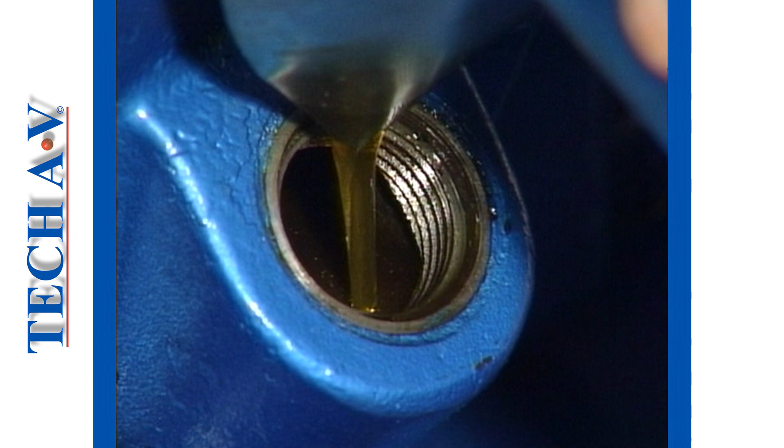The first important check is to see that the level is correct. The oil level determines the amount of oil being held within the crankcase. There are three main types of oil level checking devices, namely the sight glass, the level plug, and the dipstick.

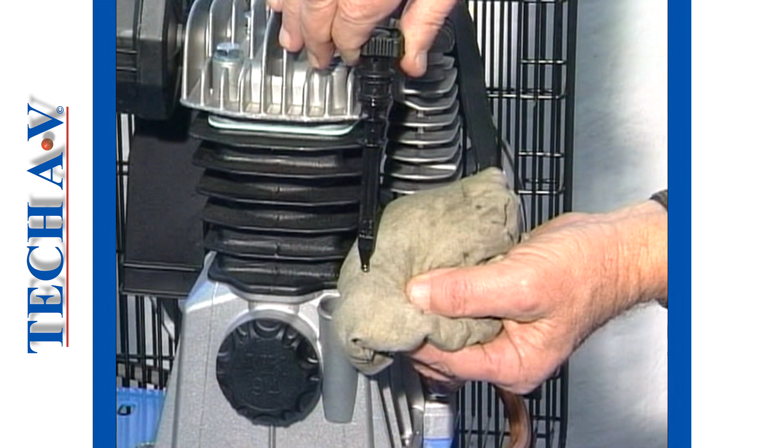Checking the oil level. It is important that the oil level is checked only when the unit is stopped and has been at rest for a few minutes. This delay allows time for the oil to settle in the crankcase.

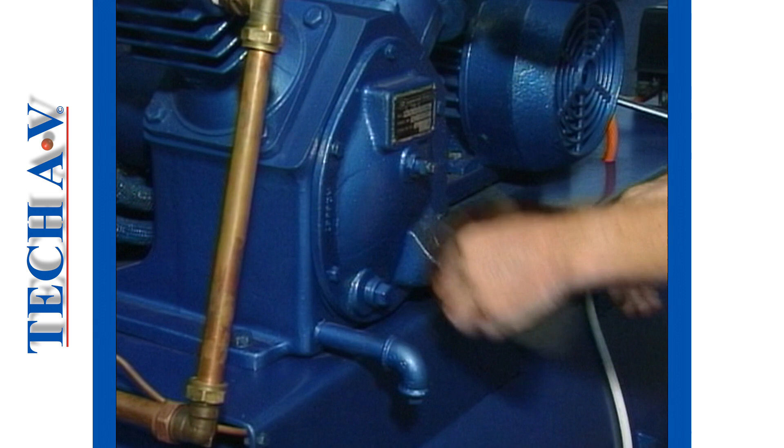Where a level plug is used, begin by cleaning the plug and the surrounding area. Using a suitable spanner, slacken and then remove the plug. Observe the oil level through the hole, where, if full, the oil should reach the top edge of the filler neck. If oil cannot be seen inside the filler neck, then the compressor is low on oil.

To check the oil level with a sight glass, observe the glass, wiping it clean if necessary, and check the level of the oil against the indicated mark, or ensure that the level is at or near the top of the glass. Oil should always be visible in the glass window.

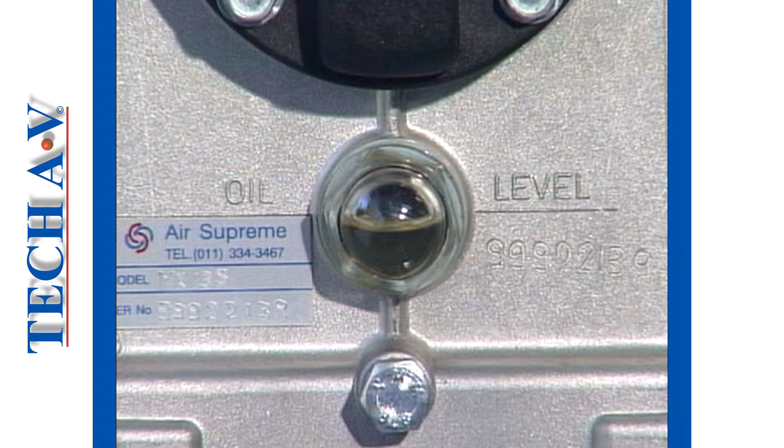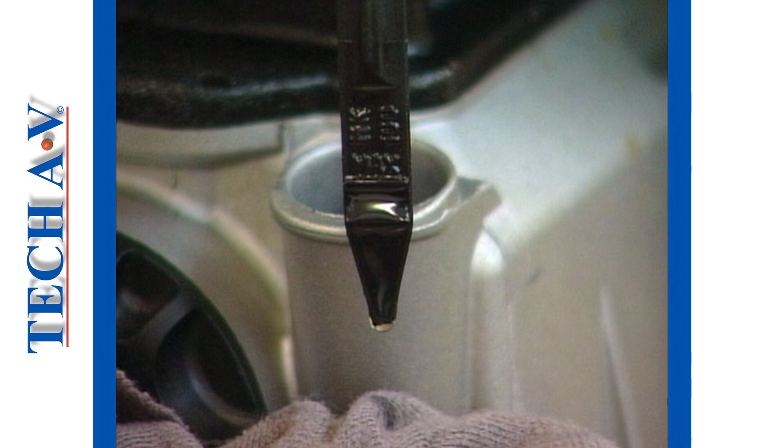On models with dipsticks, begin by cleaning the area around the dipstick. Remove the stick and wipe it clean. Return the stick into the tube or hole and push it fully down. Remove the stick again and, keeping it upright, observe the oil mark. The oil should reach the full mark, or at least be above the low mark.

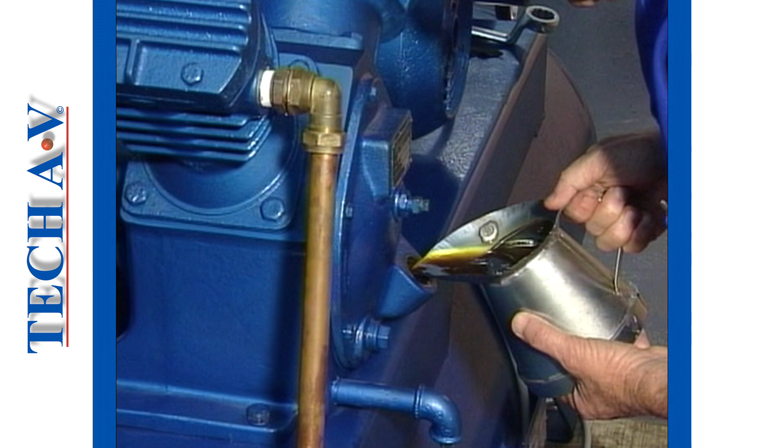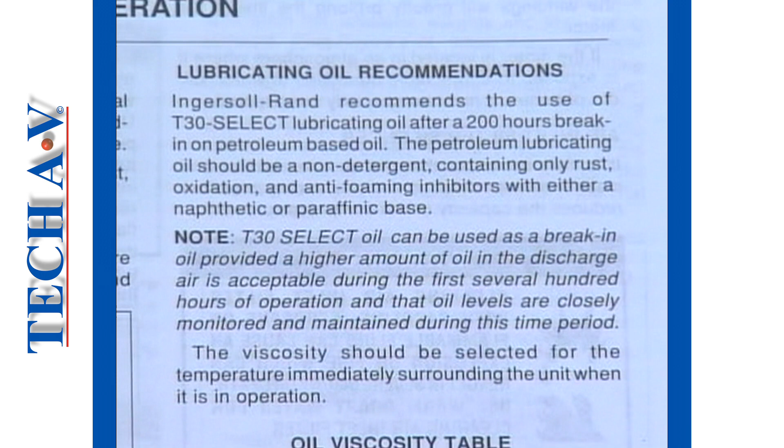Topping up simply means adding sufficient oil to return a low level to a full level. First, it is very important that you know what type and grade of oil is to be used. Adding the wrong oil can result in major damage to a compressor. There are three ways in which you can find out the correct oil to use. Firstly, you can check the unit's operating manual. Or you can look on the unit for the specification label or plate. Or you can ask your supervisor.

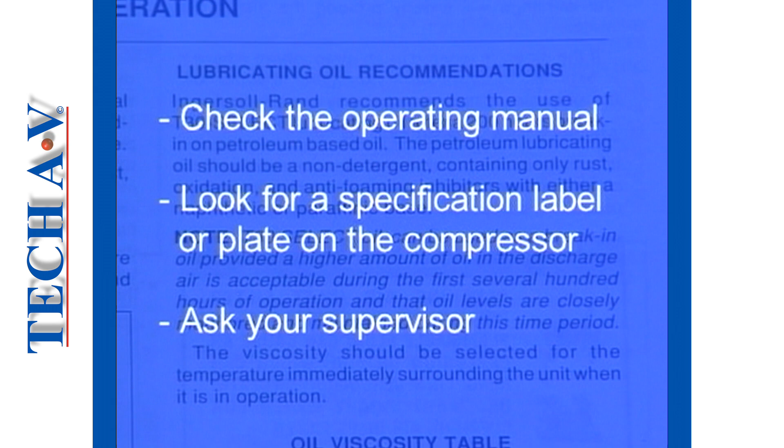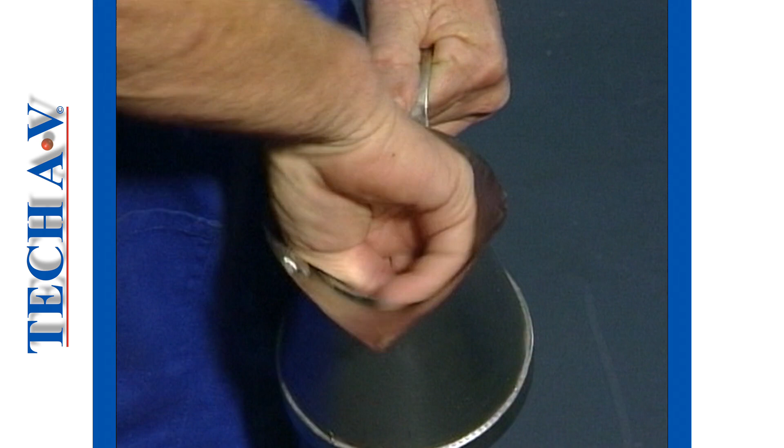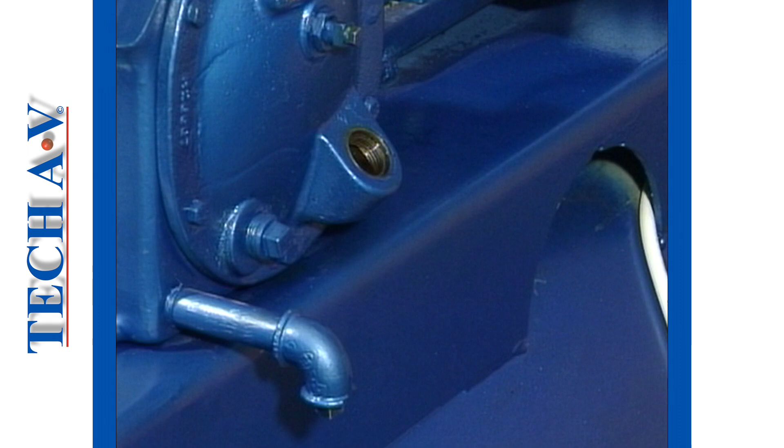We don't need dirt or other contaminants entering a compressor. So, before topping up, make sure that everything is wiped clean. Remove the oil filler cap and pour the oil slowly into the compressor. If you try to speed up this process, the oil will blow back and will be wasted, besides making an oily mess everywhere. Add sufficient oil to bring the level up to the relevant full mark, but do not overfill the unit. Replace the filler cap as soon as the topping up has been completed to reduce the chance of contaminants entering the compressor.

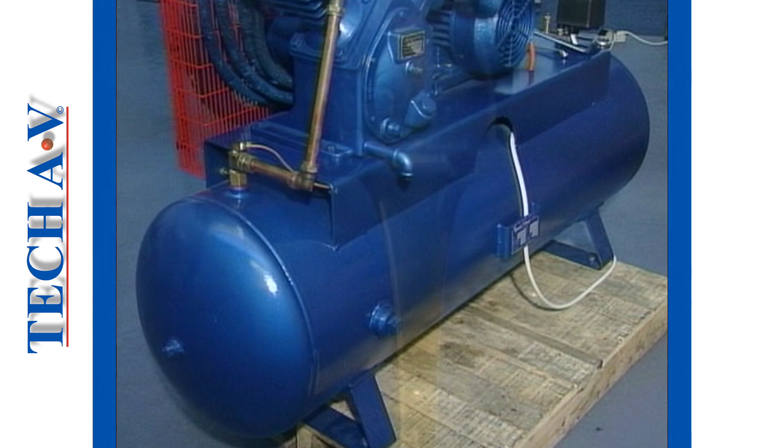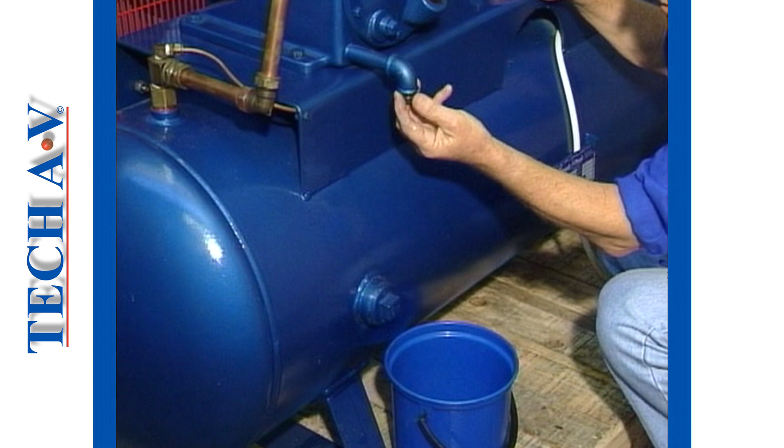Oil must be changed at regular intervals, according to the manufacturer's recommendations, in order to extend compressor life. An oil drain plug will usually be found at the base of the crankcase. For best results, oil should be drained whilst the compressor is at operating temperature and with the filler plug removed. Place a suitable catcher container below the drain plug, and then remove the plug. As it can take quite some time for all the oil to flow out, you might want to attend to other tasks while this is going on.

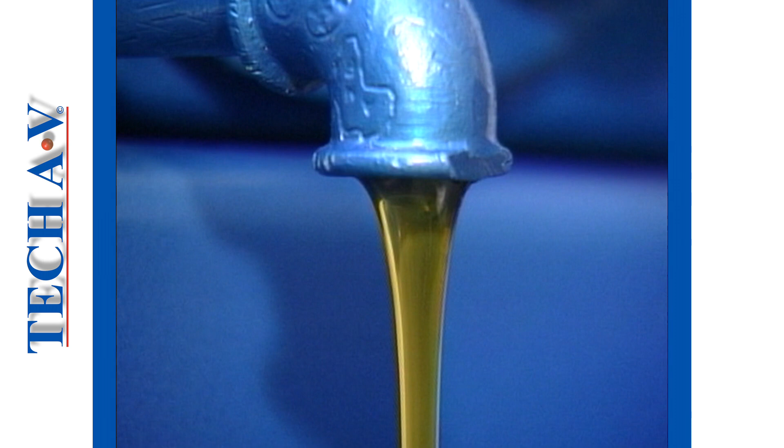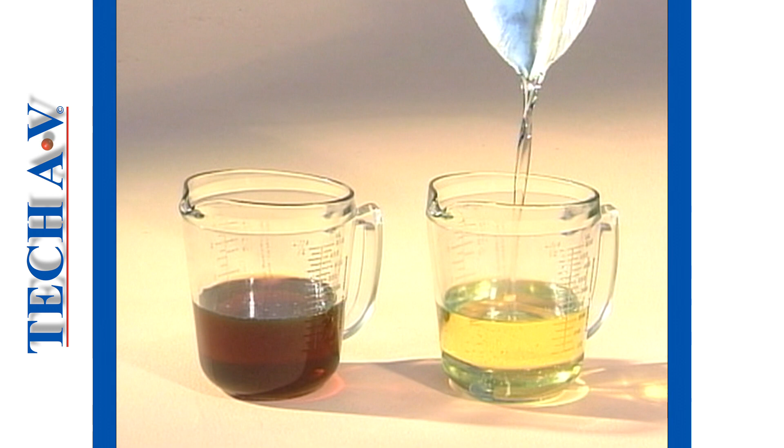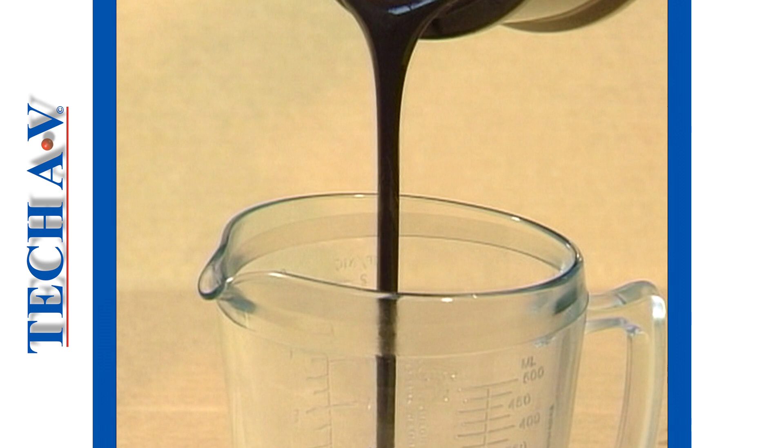Certain clues about the compressor's condition can be obtained by checking the condition of the oil as it drains. New, fresh oil is always clear and clean in appearance, although colors may vary between different manufacturers. Oil is designed to hold dirt and contaminants in suspension as it works, and this is why you will find that it goes dark after many hours of normal operation. Something is wrong if the oil appears milky when you check or drain the system. Something is also wrong if the oil is black, thick, and smelly. Both these conditions should be reported for further investigation.

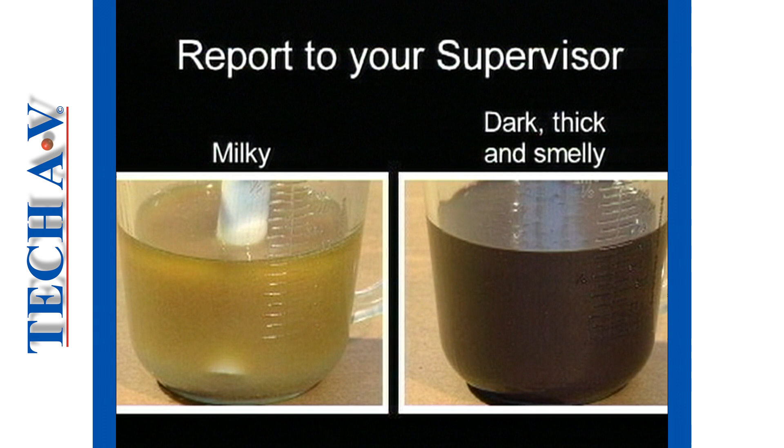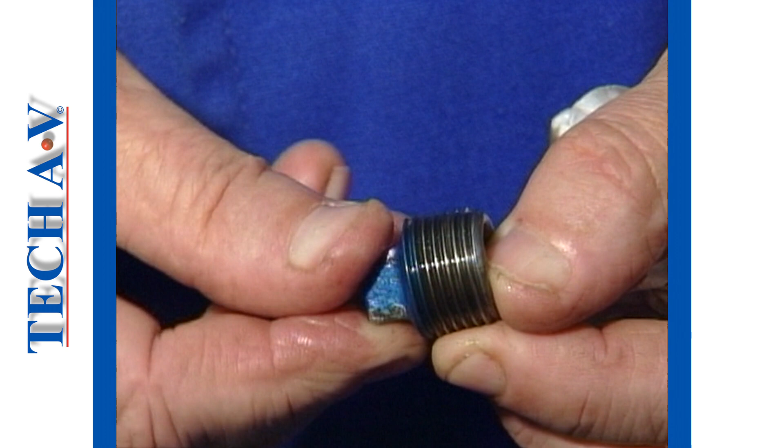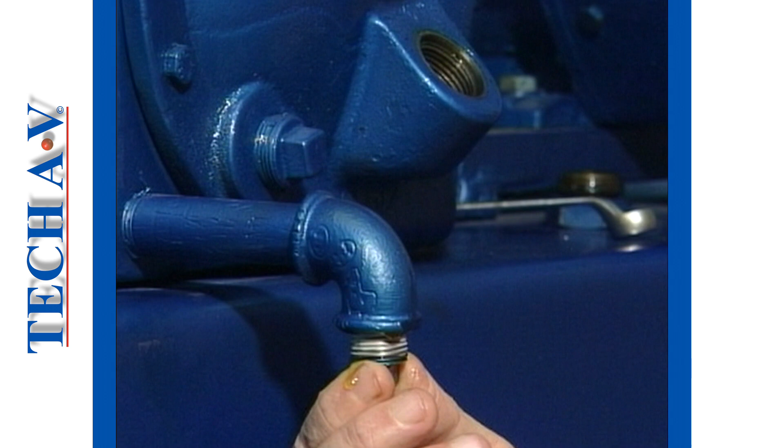When the oil has completely finished draining, then the drain plug must be replaced. Check the thread condition of the drain plug. Damaged threads could result in a leak. It is suggested that thread tape be applied to minimize the chance of a leak where plain plugs are used. Replace and secure the drain plug.

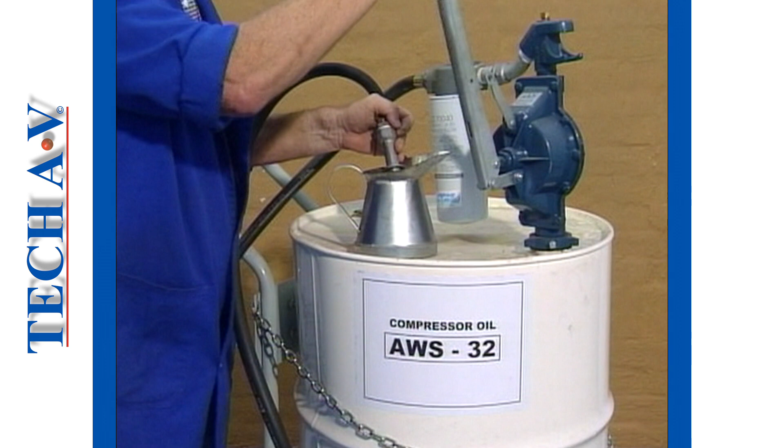Next, obtain the correct quantity and type of oil. Fill the crankcase to the proper mark in the manner described for topping up.

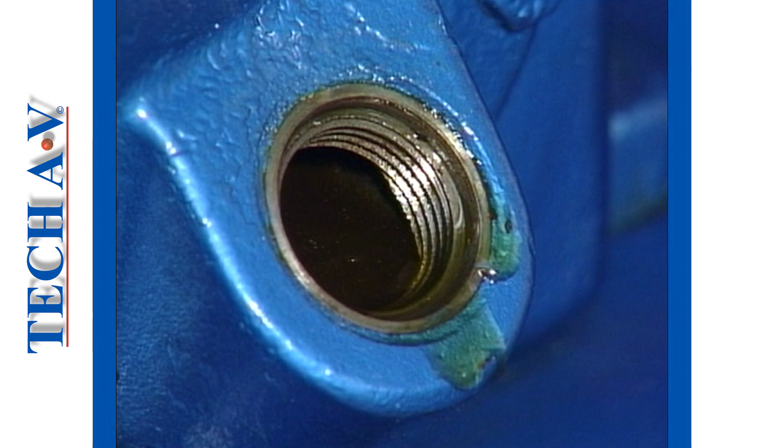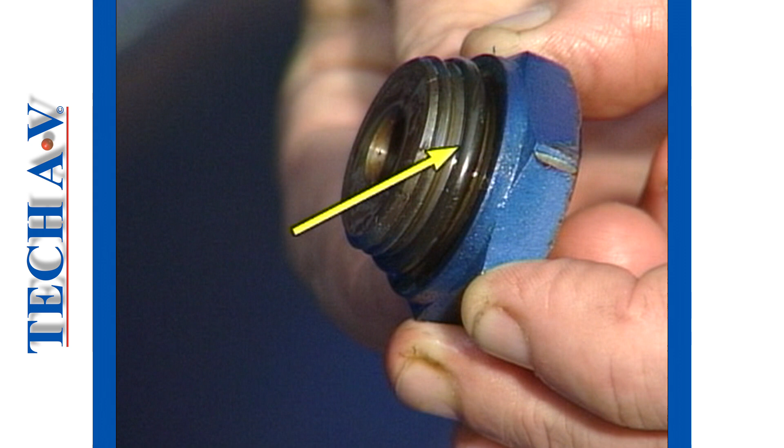In some instances, such as we have here, the filler plug incorporates a sealing device to prevent dirt from entering the crankcase. On this plug, it is an O-ring. On other plugs, it may be a copper washer. Make sure that this seal is in place and is in good condition. Replace the filler cap or plug and wipe away any spills.

In summary, when dealing with lubrication, the important points are using the correct and recommended type of oil and keeping everything clean as you work.

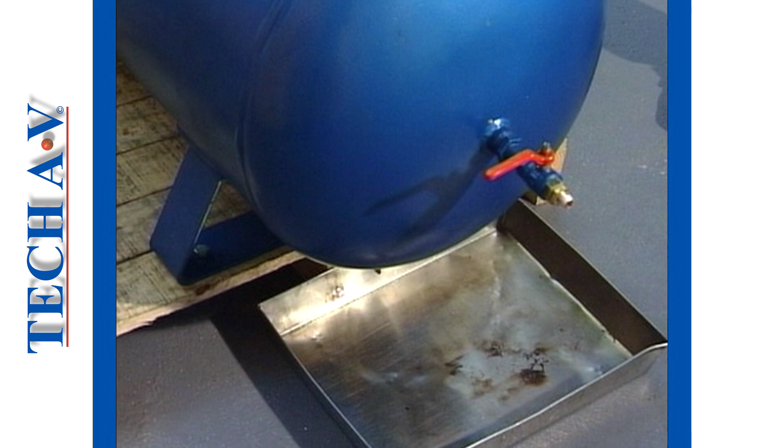Draining the condensate. Condensate is the term used to describe the water that collects in air systems from the condensation of airborne moisture. On most tank-mounted compressors, the condensate is normally drained manually from the receiver. The drain valve is situated beneath the tank and will always be at the lowest point. If the drain valve is not connected to a waste line, then place a catcher tin beneath the valve to commence the job.

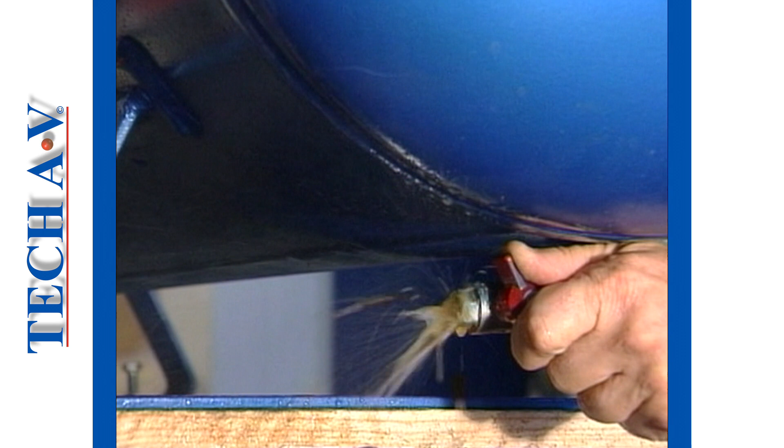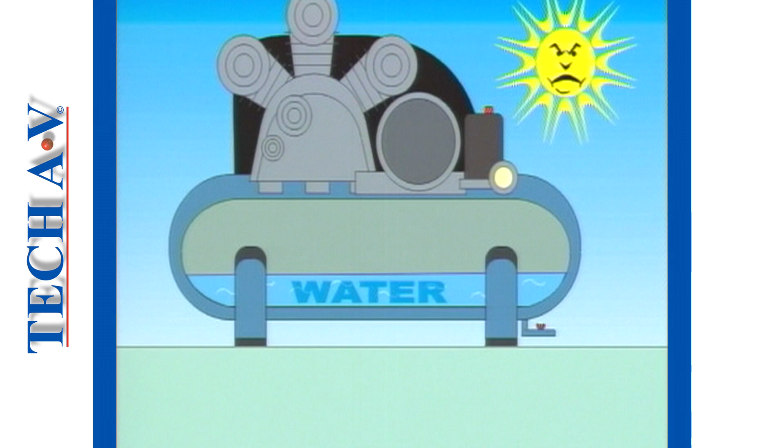Slowly open the drain valve and allow the water to drain off. You don't need to open the valve fully, as this will only waste air. Failure to drain the condensate on a regular basis, especially in warm weather, will result in excessive water entering the system.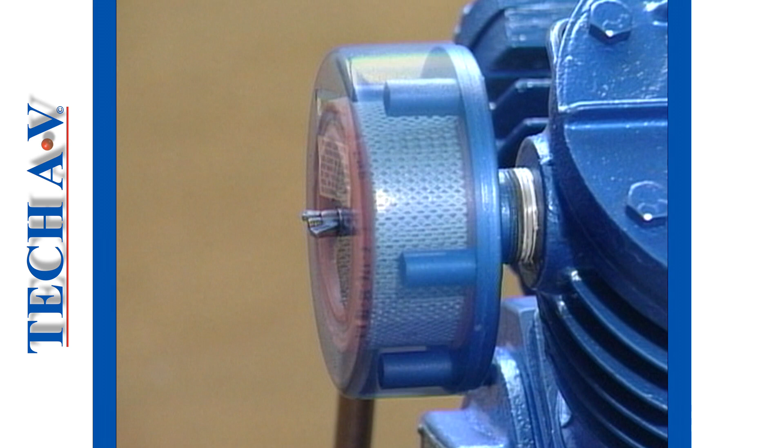In this section, we will describe air filter service operations. The fundamental purpose of an air filter is to prevent solid particles from entering the compressor and the rest of the system. The most common type of air filter comprises a filter housing, in which you will find a dry-type filter element. Most dry filter elements are constructed of a special type of paper through which the air will flow. The paper is known as the filter medium.

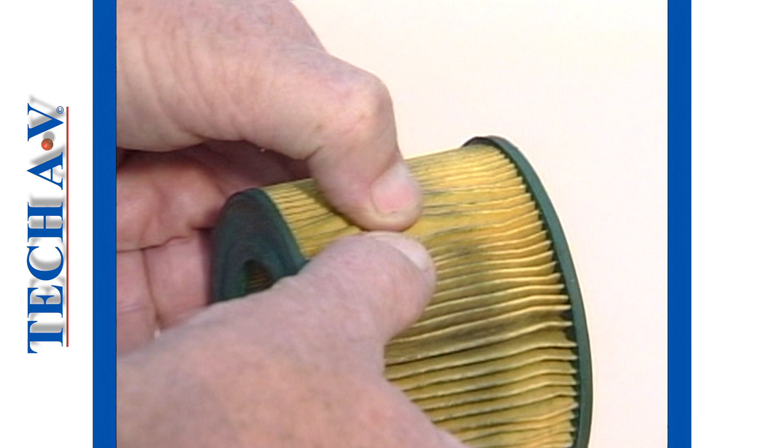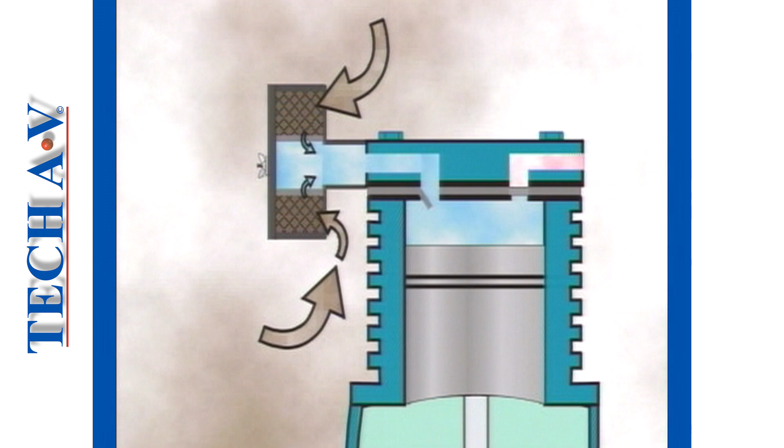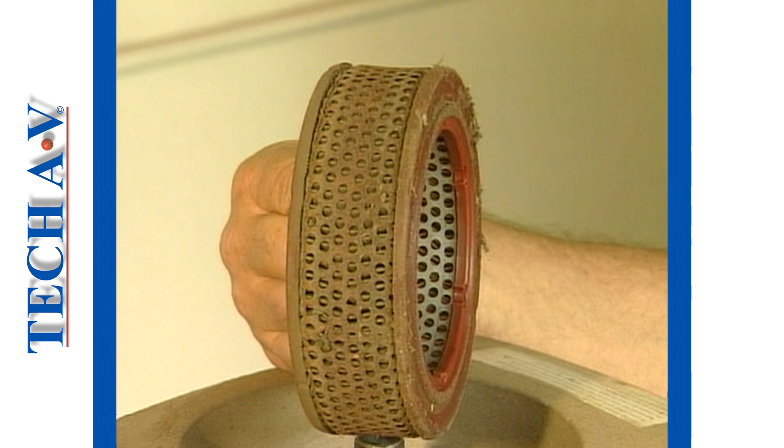Dirt and solid particles become trapped in the medium, and eventually the filter can become clogged. When a filter is clogged, the air cannot easily pass through, and the compressor will not provide its proper delivery. For this reason, a filter element must be either cleaned or renewed periodically. If the local conditions around the compressor are simply dusty, then a filter element can be cleaned.

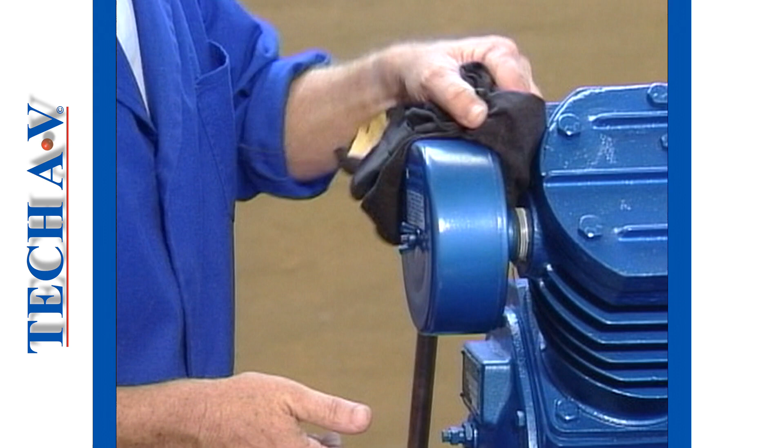We shall now describe a typical cleaning procedure for a dry-type filter element. Begin by wiping away the dust and accumulated dirt from around the filter housing. Remove the securing nut and then take off the housing. Separate the element from the filter housing.

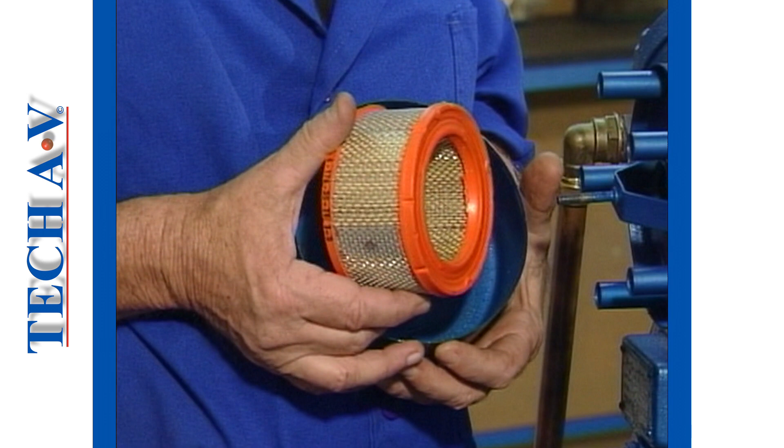As our demonstration unit has done no real work, the element is still very clean. This is not a normal situation. In an industrial environment, an element may become very dusty. A few taps against your hand will dislodge the heavy dust particles.

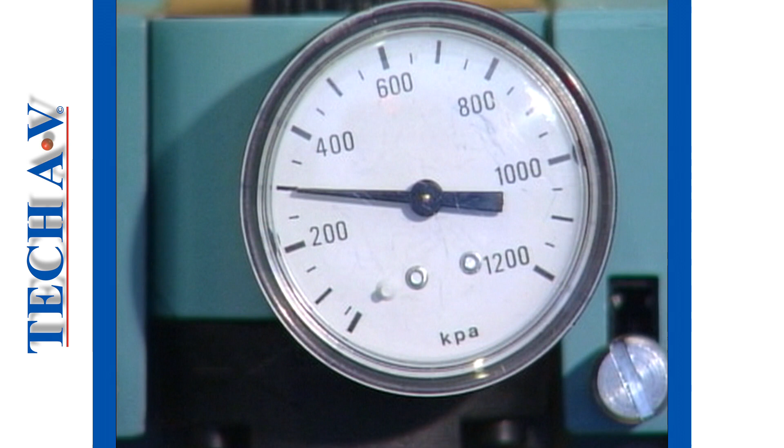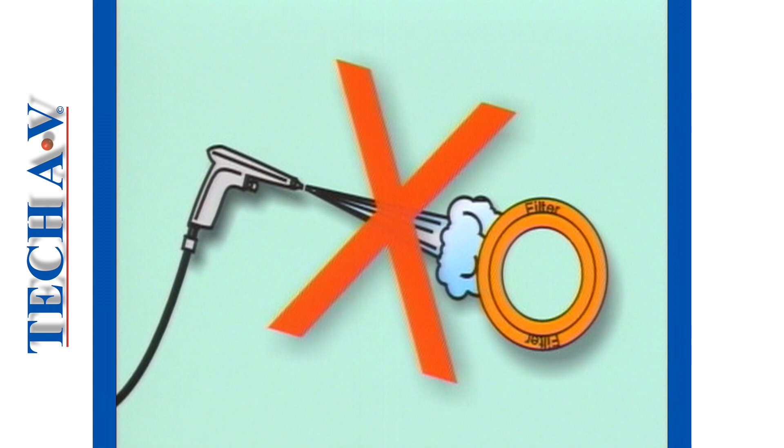Now, with the shop air hose and the duster gun, blow the filter from the inside. Note that you must not use a pressure higher than 3 bars for this operation, or you will damage the filter medium. Blowing from inside to the outside forces the particles to be pushed out the way they entered. If you try to blow from the outside, you will, in effect, be pushing the particles deeper into the filter medium, and this will result in further clogging.

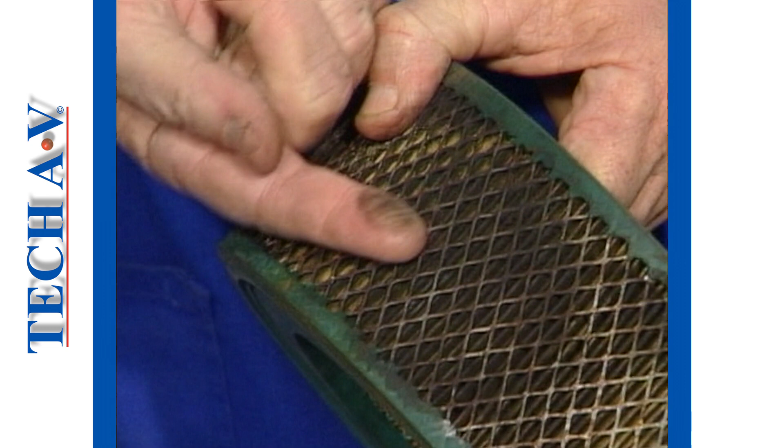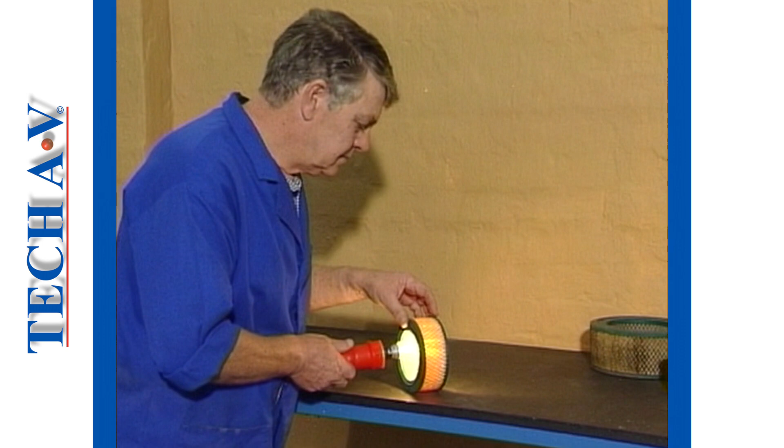In this example, the element is contaminated with a greasy residue, caused, most possibly, from local fumes. This element cannot be cleaned using the air hose, and it will need to be discarded. Use an inspection light inside an element and check for any small holes or tears in the filter medium. We should never reuse an element that is damaged, as dirt can enter the compressor through very small holes or tears.

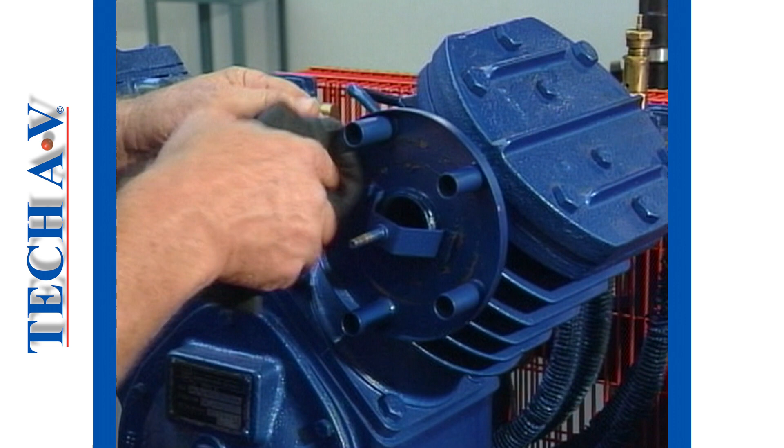Although a very basic task, the fitting of a filter must be done correctly to avoid dust entering a compressor. Wherever the filter housing is threaded into the cylinder block, it is always recommended that thread tape is used to seal the threads, thereby minimizing the risk of dirt bypassing the filter. Wipe the filter housing to remove dust and dirt before you replace the element. Assemble the unit carefully, making sure that the element sits properly on its mounting or base.

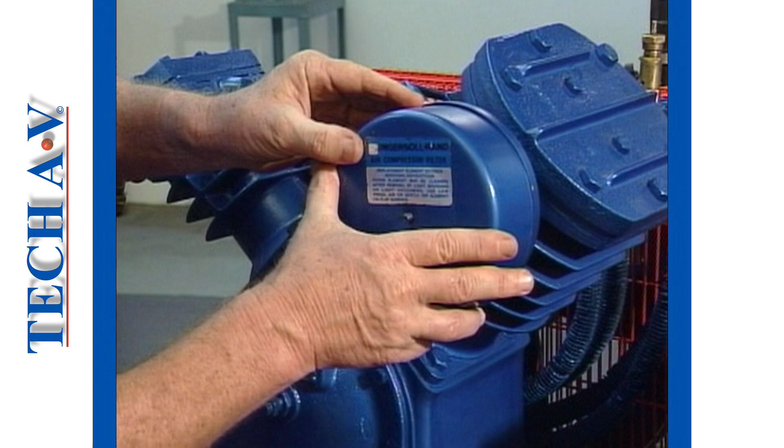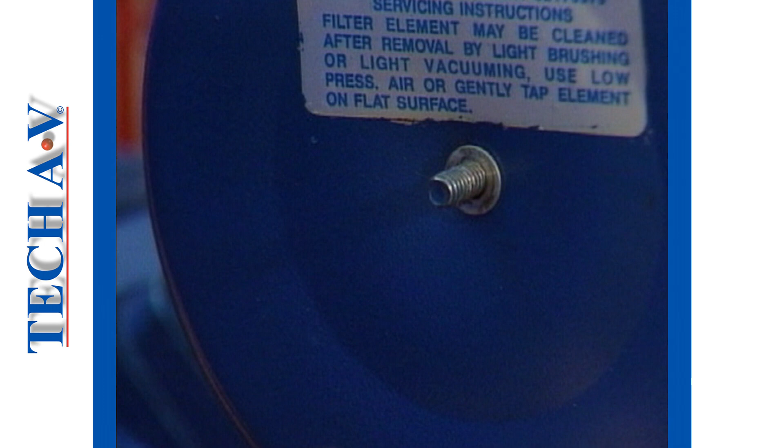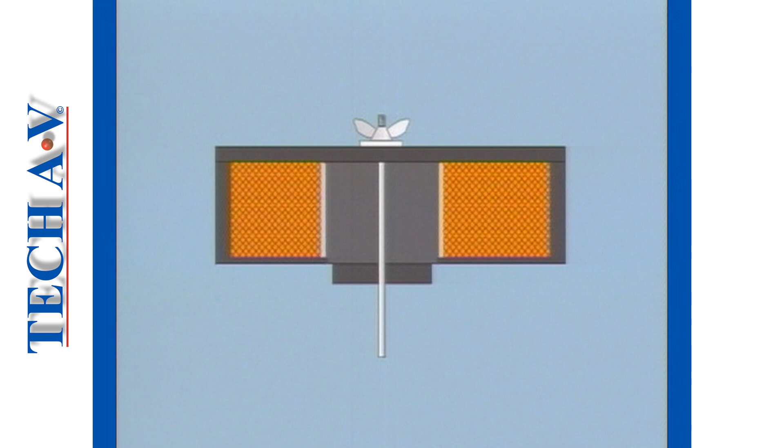Replace the cover. Where applicable, but very importantly, replace the washer that sits beneath the retaining nut or screw. If you leave this off, you run a great risk of dirt entering the compressor. Fit and secure the retainer, but do not over-tighten. Where flat metal covers are used, check that the cover sits flush to the housing and that there is no distortion. A distorted cover will permit dirt to bypass the element and enter directly into the cylinder.

In this section, we shall deal with the procedures involved with servicing drive belts. When working on the drive belts, it is vital that the compressor is totally isolated from the power supply. To perform this task, you will usually need to remove the safety guard. With the guard removed, check each belt for signs of wear or damage.

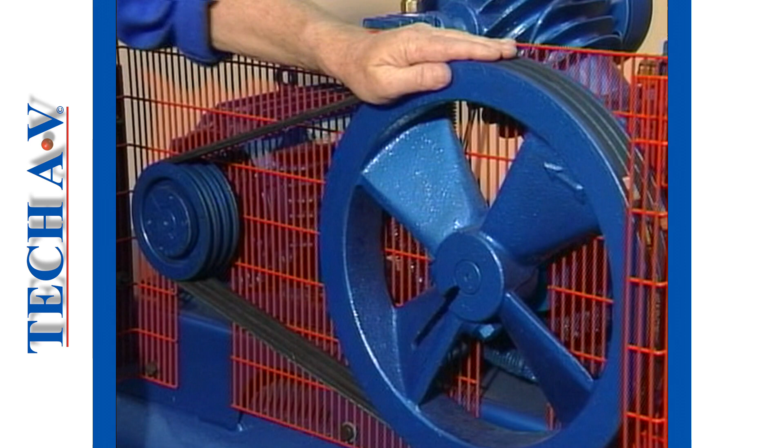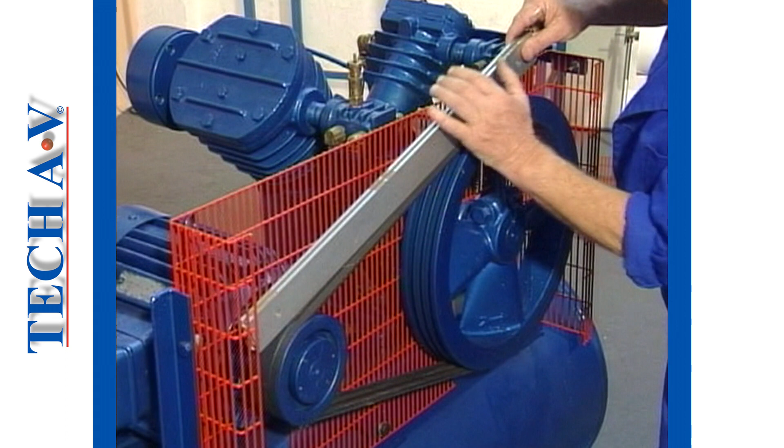Rotate the flywheel carefully so that you can inspect the full length of each belt. Check the tension, making sure that the tension is equal between all the belts. If the tension is not equal, then a new matched set of belts will have to be installed.

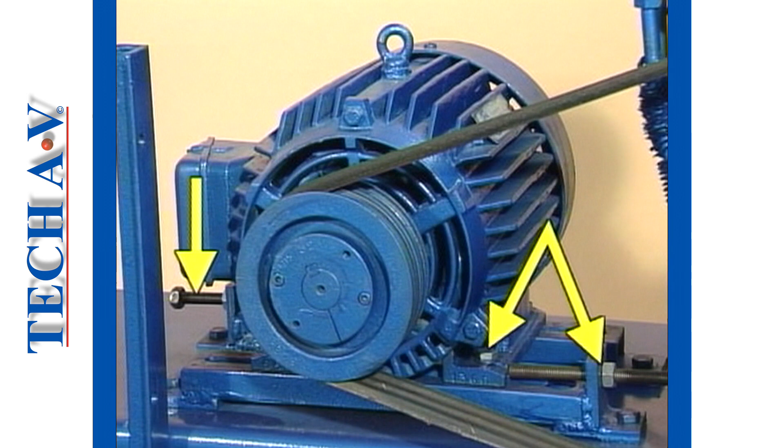Where applicable, adjust the tension in the appropriate manner. Note that the subject of belt maintenance is fully covered in Tech AV modules B-C-D. To complete the task of belt maintenance, refit the guard and check that it is secure.

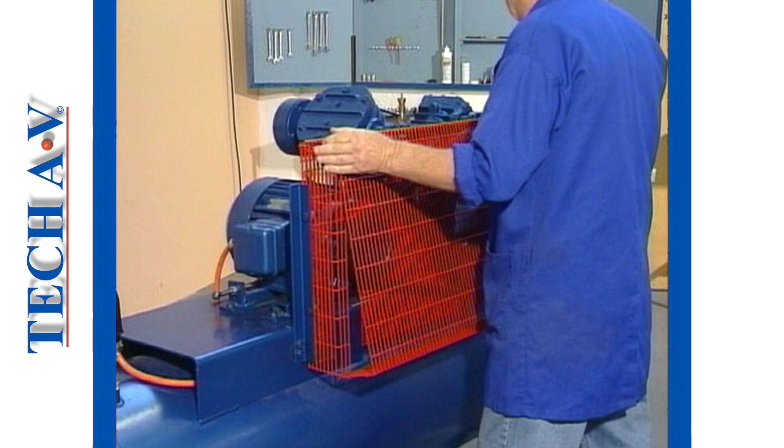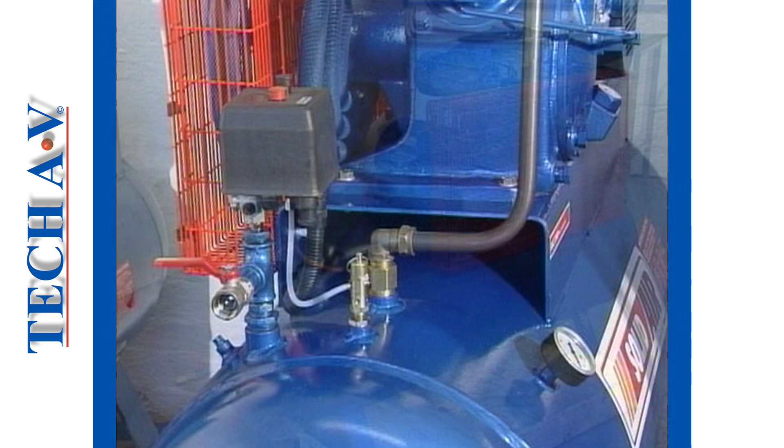Certain routine checks can only be made with the compressor operating, or when there is pressure in the receiver. We shall look at these tasks in this section. Every receiver must have a safety valve, and these must be checked to see that they operate. The task is very simple.

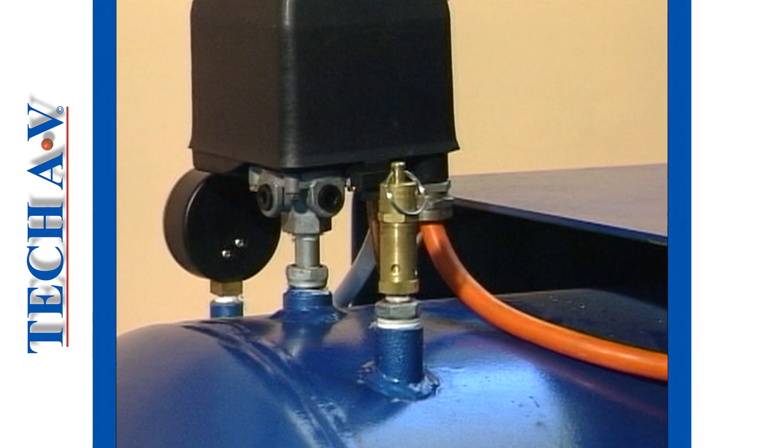With the compressor operating at or close to its maximum operating pressure, simply pull the spindle using the pull ring and then let it go again. Air should release and then shut off quickly when you release the ring. If a safety valve does not release air or does not shut off quickly when released, then report this to your supervisor.

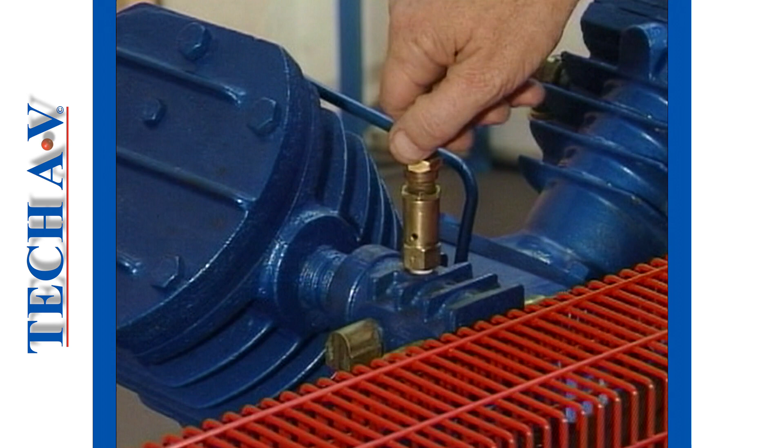Two-stage compressors have a safety valve on the interstage outlet. Test this valve in the same manner as the tank valve. Note that this valve will only operate whilst the compressor is running. Compressors equipped with a cutout should be tested to see that the cutout is correct. This, too, is a very simple task.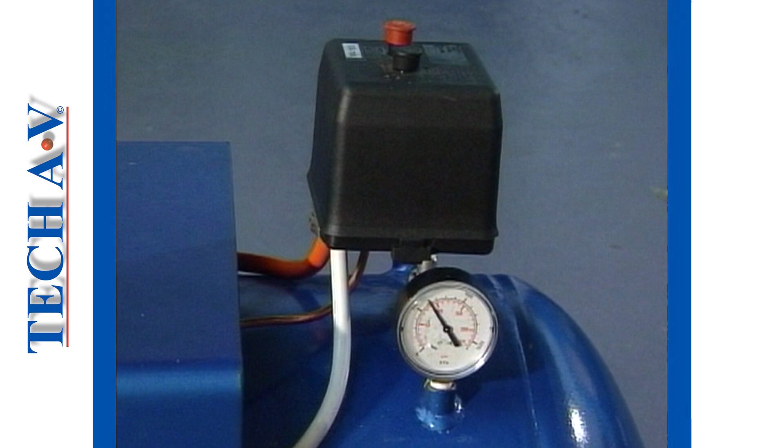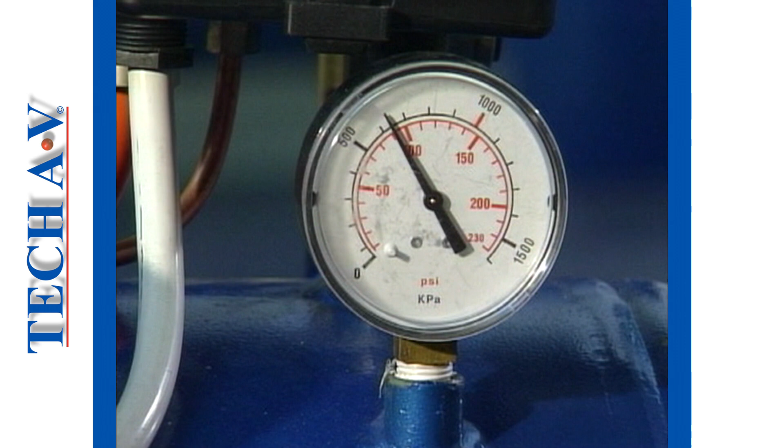Close the main supply valve in order to keep the pressure restricted to the receiver only. Simply note the pressure at which the compressor motor cuts out. This pressure should be limited to the system pressure set for your system by your plant engineers. Although the cut-out and the cut-in pressures can be adjusted, you must not make any adjustment on your own. When necessary, ask your supervisor to check the pressure and to make any adjustment.

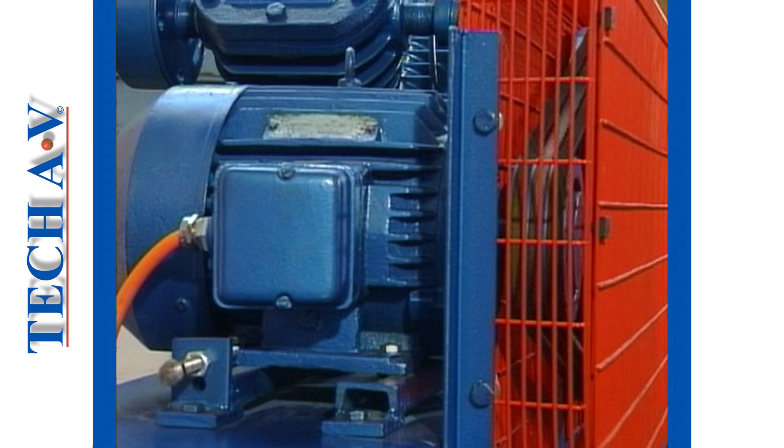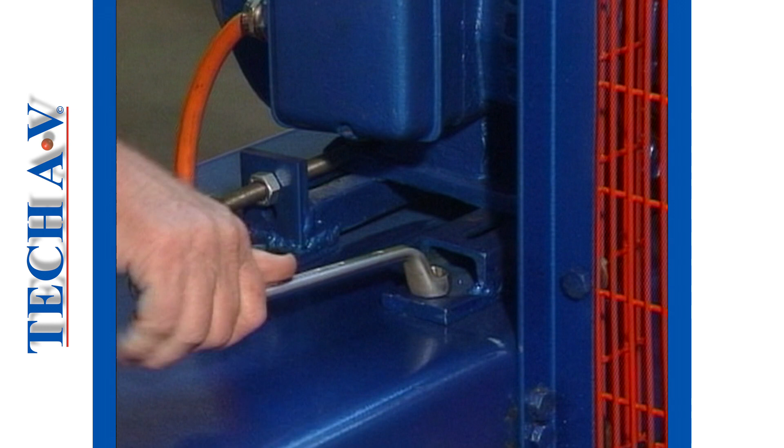Reciprocating compressors are prone to vibration, which results in the need to check the fasteners on a regular basis. Begin the fastener check only after making absolutely sure that the unit is switched off and isolated. Use suitable spanners to check and secure the mounting supports for both the motor and the compressor pump unit. These fasteners need regular attention.

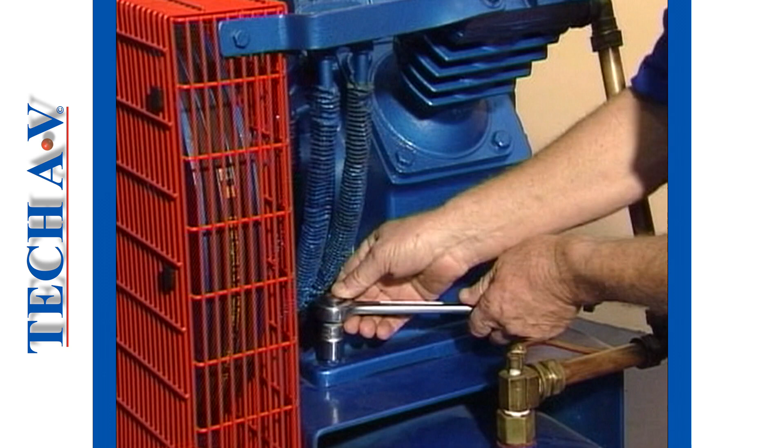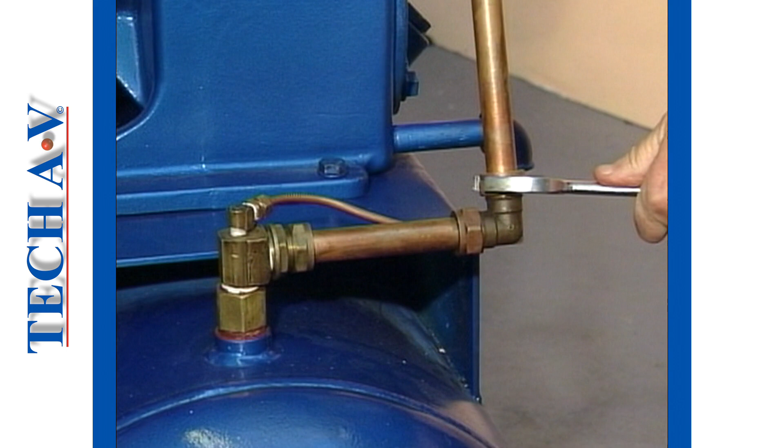A check should be made on all the pipe unions as well. Loose unions will result in leaks and power wastage. Do not overlook items such as the belt guard supports during the fastener check.

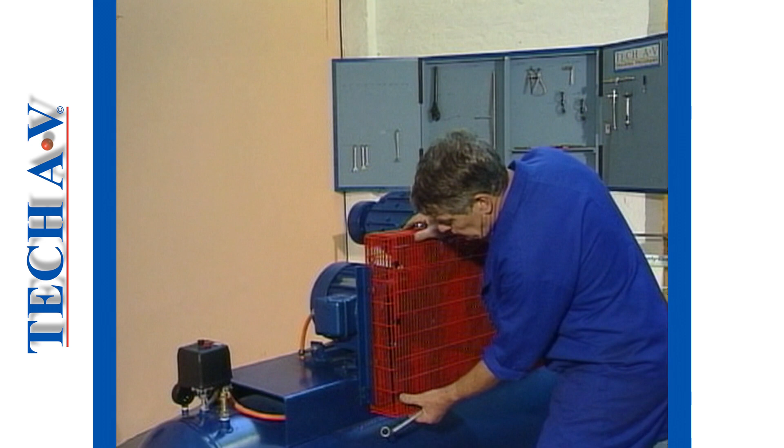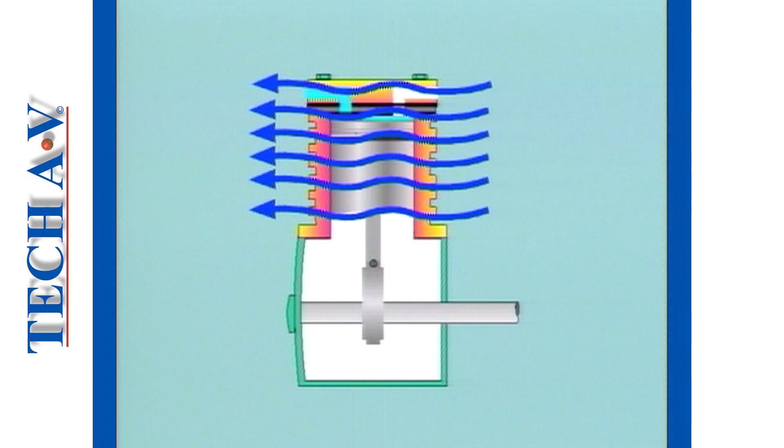Although it seems unimportant, the cleaning of a compressor unit is vital to its operation. Any air-cooled machine relies totally upon an efficient heat transfer between the metal parts and the surrounding air. Anything that interferes with this heat transfer, such as dust and dirt, will cause overheating, and this in turn will result in premature failure of a compressor.

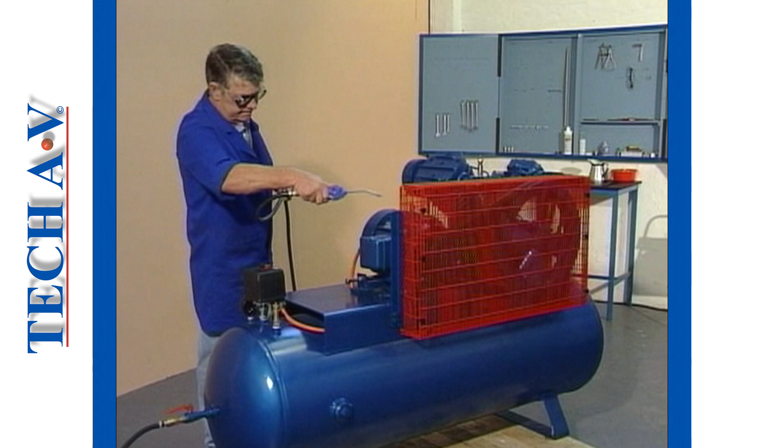The simplest way to clean a dusty compressor is to blow off the dust using an air gun. Make sure that you are wearing your safety goggles or other suitable eye protection. Blow from top to bottom all over the compressor unit, keeping the nozzle directed away from your body. Pay attention to the cooling fins. Blow away all debris and dust from these areas.

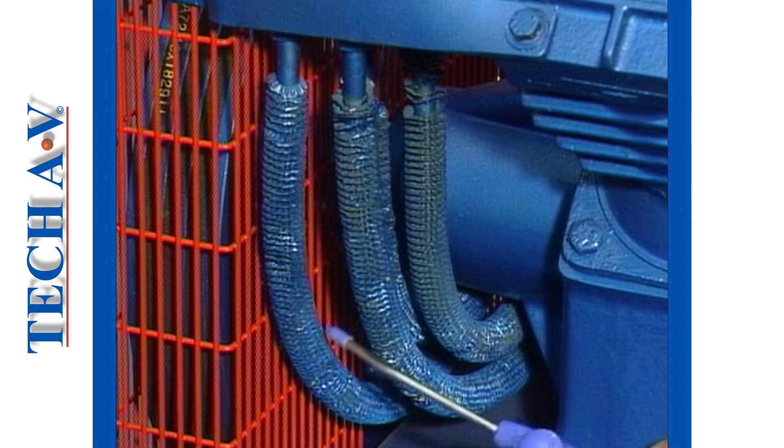Use the nozzle of the air duster gun to get into the intercooler fins. You will notice here on our training model that the fins are coming away from the tubing. This sort of problem will result in poor performance of the compressor. An intercooler in such a condition should be repaired as soon as possible.

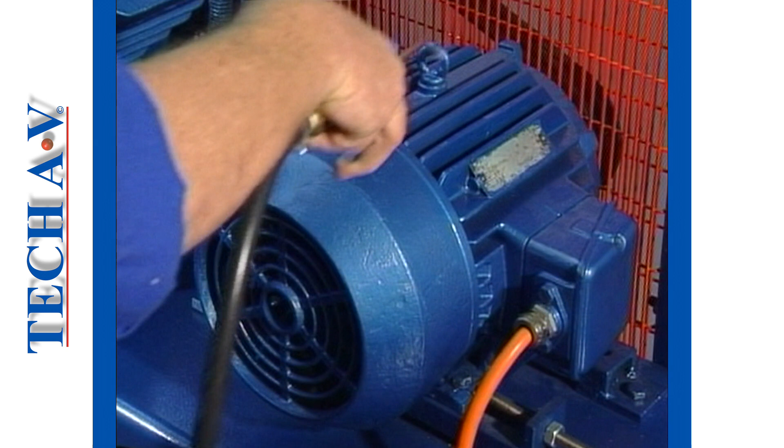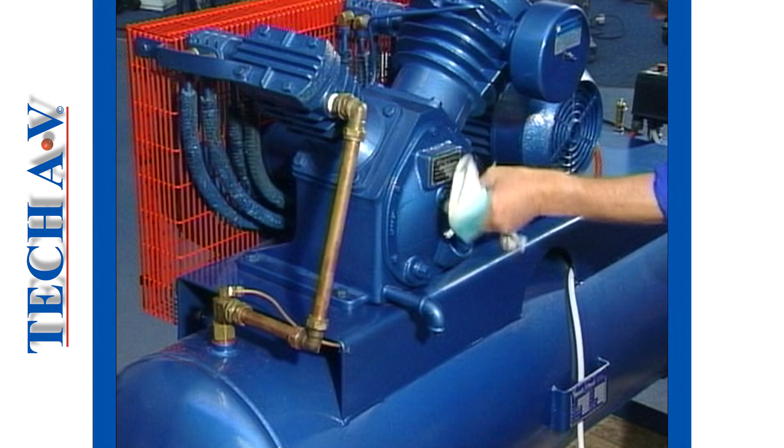The drive motor too should be kept free of dust and dirt. A word of warning here: never wash a motor with water or any other fluid, as this could lead to your being electrocuted. A clean compressor is generally a healthy compressor, because, as you now appreciate, cooling will be more efficient and the chance of overheating will be greatly reduced.

To conclude this module, we would like to offer a final piece of instruction concerning the starting and stopping of a compressor. As a general rule, always start and stop a unit at its control switch, which is usually incorporated into the cutout control box. It is not recommended to stop a unit directly from the power point. In fact, some compressors will be badly damaged if you do this.

After a service, operate the compressor and keep an eye on things for a few minutes, or until it is obvious that all is well. This concludes Module 2 in this series. You can learn more on the subject of compressed air systems maintenance by working through the other modules in this series.